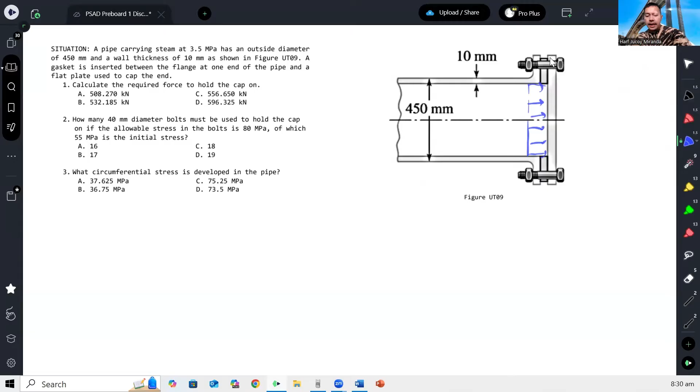Okay, so unahin muna natin unang tanong, what is the required force to hold the cap? Paki-imagine niyo na parang ito ay pipe, tapos syempre may steam doon, so merong pressure dito. Kaya ang nangyari, nung tinakpan mo, syempre magiging under pressure itong cap na to.

Kasi ang tendency, gustong lumabas ng steam, di ba? So ang tinatanong sa atin sa una, ano yung force na kailangan i-resist? Syempre, yung kailangan na force dyan ay kung ano yung resultant force dito. And how do you calculate that?

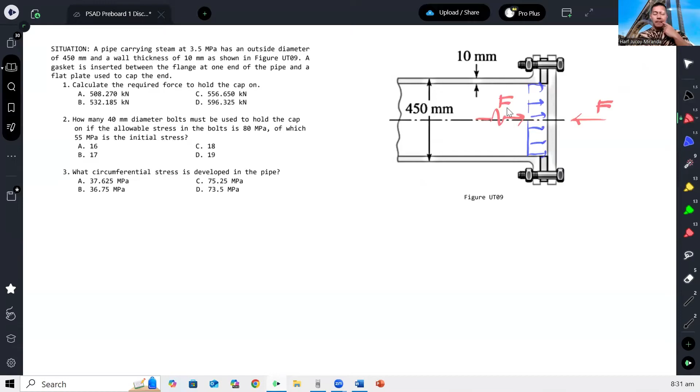Kung titingnan natin sa 3D, ano lang kasi yan eh, circular, ganyan. Tapos syempre nandito yung pressure, paikot, di ba? Nakaikot sila doon.

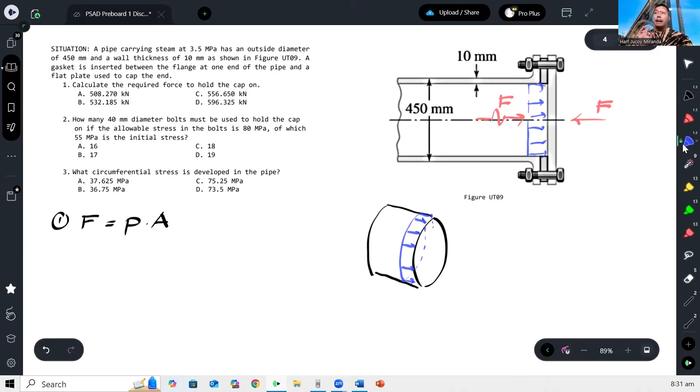So lumalabas, para makuha natin yung force F for number 1, kailangan ko lang pressure times yung area, di ba? Pressure times area lang yan. Yung area, yung cross-sectional area kung saan nakalapat yung force, bali ito yun. Yan yung area kung saan siya nag-act o tumatama, no? So yung area na yan, take note lang na diameter ito, no?

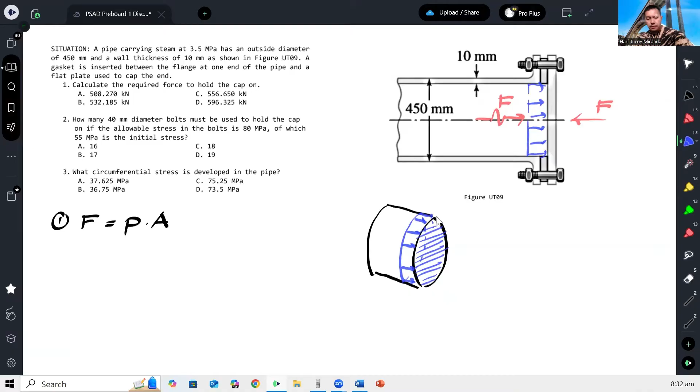May diameter diyan. Pero take note, itong diameter, dalawa yan, ano? Itong 450, outside diameter yan. So ano ba ang gagamitin? Yung outside diameter ba o yung inside?

So ang sagot ay dapat po yung inside, kasi nandun lang naman sa loob yung steam. So itong pressure na to nararanasan dun lang sa loob, no? Wala pagdating dito, wala nang steam diyan, syempre kasi steel pipe na yan eh. So ito lang, nandito lang yung steam sa loob.

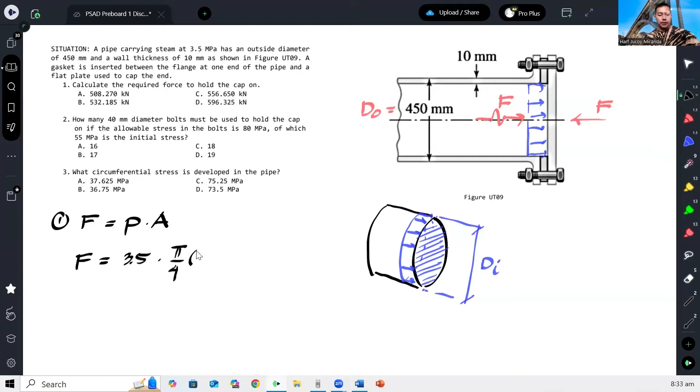Kaya dapat ito ay inside diameter. So therefore, our force must be equal to yung pressure, ito yon, 3.5 megapascal, times area, pi over 4. Inside diameter would be 450 minus thickness is 10, minus dalawang 10, so that gives us 430. 430 squared. So the force would become, naka-megapascal ito kaya lalabas dyan ay Newton.

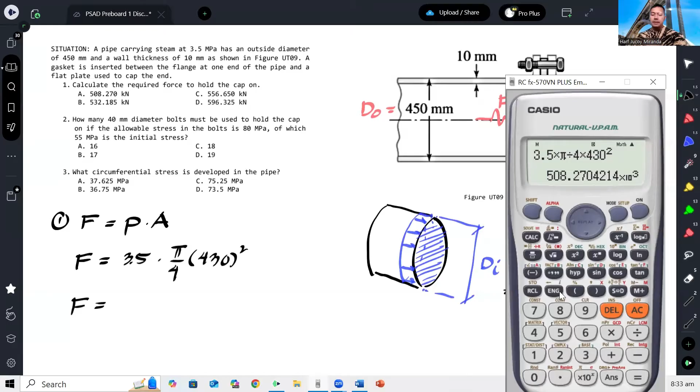So 3.5 times pi over 4 times 430 squared. Ang lalabas dito ay naka-Newton. Para maging kilo, divide mo lang ng 1,000. That gives you 508.27 kilonewtons. So that is letter A.

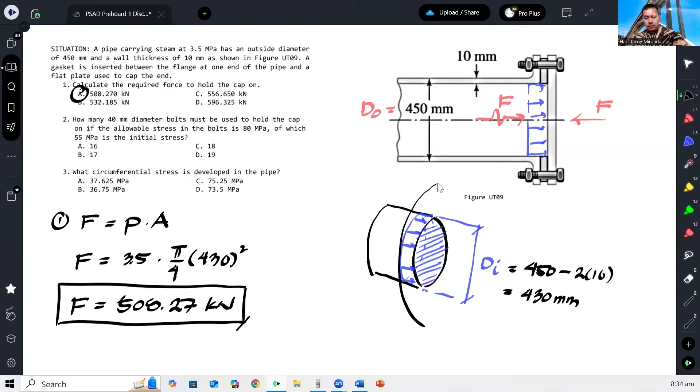Next, how many 40 mm diameter bolts must be used to hold the cap? Ilan naman daw yung kailangan mo na ganito? Okay, so ang idea ulit, parang ito kunwari yung ano natin, flange. Ayan, kunwari yung flange natin, yung cap na to. Okay, so maglalagay tayo ng mga bolts. Yan, lalagay tayo ng mga bolts. So yung mga bolts na yun, yun yung kukontra sa force na to. Kaya sila yung kukontra.

Okay, and how do we compute that? Well, obviously, kung meron ka ditong force ng isang bolt, individual force ng bolt, no? So dapat, kapag nag-summation of forces tayo for number 2, dapat yung lahat. Kapag in-add mo lahat ng individual force ng bolt, ay equal dapat dun sa force na to para ma-hold niya yung cap. At dahil yung bolts naman natin, iisa lang yung diameter, kaya it will be safe to say na pare-parehas lang din sila ng individual force. Kaya sabihin na lang natin ito na yung total na force will be yung number ng bolts times yung force ng isang bolt is equal to F.

Okay, ano ba ang force ng isang bolt? Binigyan po tayo ng diameter, binigyan po tayo ng allowable stress. So syempre, ang allowable stress, you can equate that with the force of the bolt divided by area of the bolt. Ibig sabihin, yung force ng individual bolt can be equated to the allowable stress times the area of the bolt.

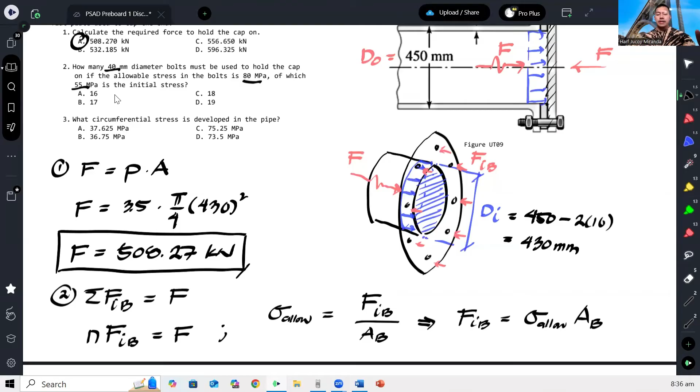Okay, kaya lang yung allowable stress natin, although ang sinabi ay 80 megapascals, meron na daw initial stress na 55. Ibig sabihin, if you are asking, bakit ganun, bakit may initial stress na involved? Kasi di ba kapag hinigpitan mo to, may stress na kagad to eh. So nung paghigpit pa lang, meron ng 55 megapascal. Tapos dadagdagan mo pa ng another force. So may stress pa siya.

So ibig sabihin, yung available na lang na allowable stress ni Bolt, hindi na 80, kundi 80 minus 55. Okay, kasi na-stress na siya eh. So ang natitira na lang na kaya niya pa is yung kung ilan na lang yung difference ng 80 tsaka 55. Pasok natin siya dito.

So, N times 80 minus 55. Tapos area ng bolt, pi over 4 times, ang diameter is 40 squared. And equate natin yan dun sa force. So, 508.27. Here we just need to be careful.

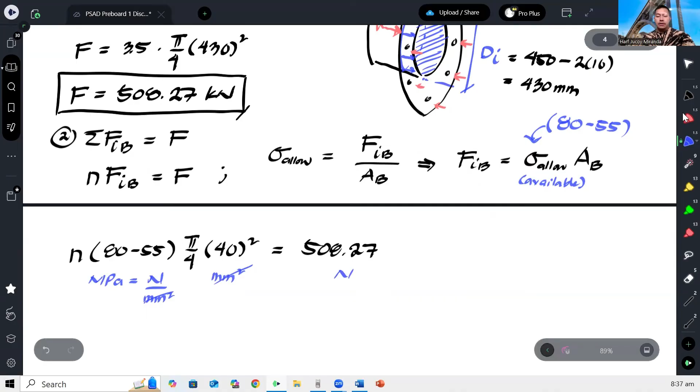Naka-megapascal kasi to, which is equivalent to Newton per millimeter squared. Ito naman magiging millimeter squared. So magka-cancel yan. So dapat pala ito naka-Newton, para naka-Newton din sila pareha. So kaya ang gagawin ko, mag-multiply ako dito ng 1,000.

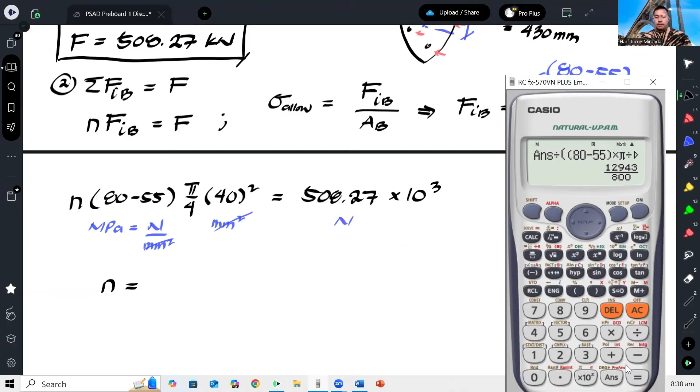So from there, we can solve for the required number of bolts. Divide lang natin ng 80 minus 55, times pi over 4 times 40 squared. Okay, and that gives us 16.18 pieces. Okay, and of course, we will round that up to 17.

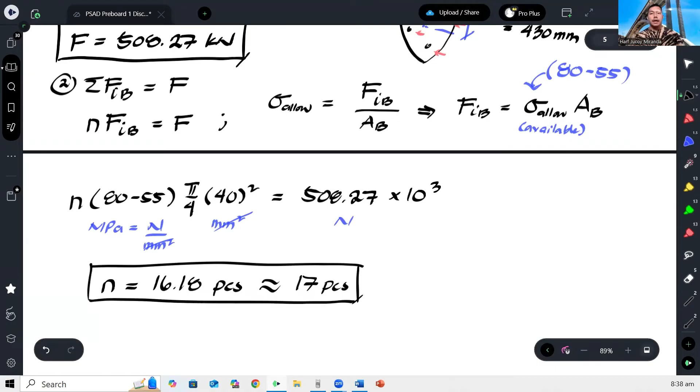Okay, so hence our answer here would be letter B. We don't round down kapag yung B lang kasi ang sinasabi na to, ito yung minimum number. Hindi ka na pwedeng bumaba dyan. Kaya hindi mo pwedeng sabihin na i-round off mo sa 16.

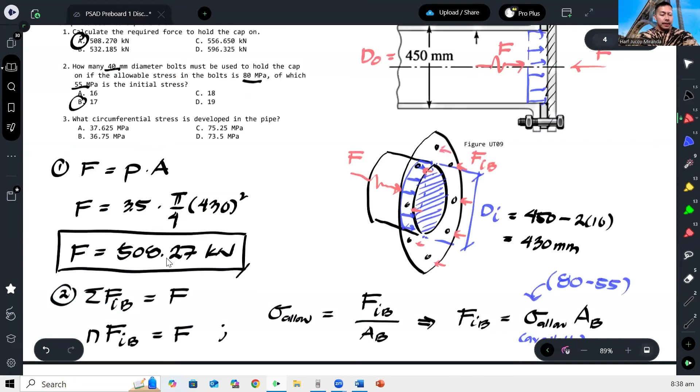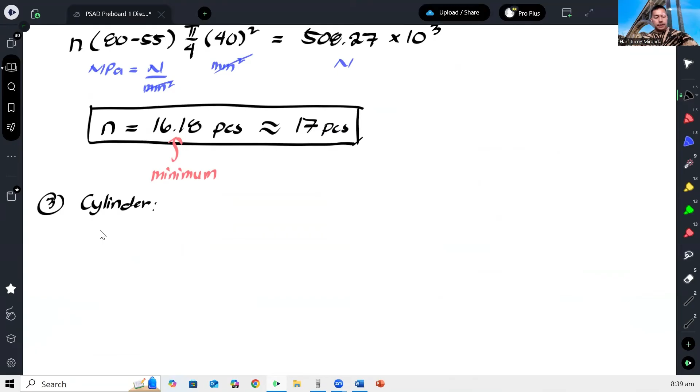Okay, now last question for this one. What is the circumferential stress developed in the pipe? Pag sinabi pong circumferential stress, parehas lang yan sa tangential stress or hoop stress. Okay, which is kapag number 3, kapag cylindrical, kapag cylinder, ang circumferential stress natin or yung tangential stress natin, is automatically calculated as PD over 2T.

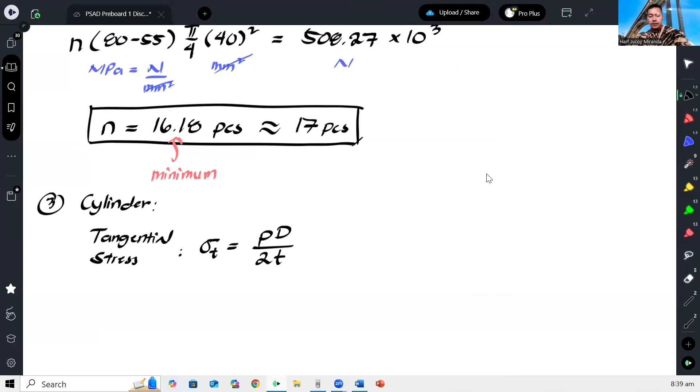Okay, P is the pressure, D is the internal diameter, and then T is the thickness. Pero saan galing yan? So nanggaling yan dito. Kung meron kang pipe, tapos kinat mo to. Okay, so pag kinat mo, tapos in-isolate mo yung ilalim, ganito itsura.

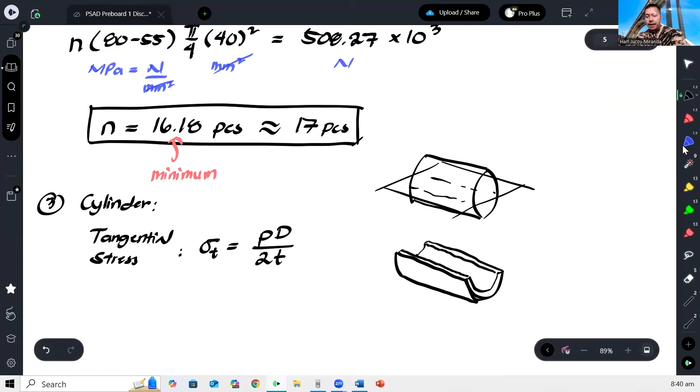Ganyan, no? So alam natin na meron ditong pressure. May pressure dyan, gawa nung P. Yung kukontra dyan, kasi ang mangyayari dyan, yung pressure na tumutulak pababa, parang gusto niyang sirain ito dito. Mahisira siya dyan, parang sasabog siya dito, sa sides. So para ma-prevent yung pagsabog na yon, ang kukontra dyan, yung mismong thickness, yung mismong pipe, yung material na to.

So yung stress na nire-develop dyan, yun yung tinatawag natin na tangential stress. Ngayon, kapag kinumbay natin yon o ginawa nating force, ito gawin kong T, sa kabilang side, gawin din nating T. Tapos kapag ginawa nating force yung pressure, kukunin natin equivalent force niyan, tawagin nating F. So lalabas lang, pag nag-summation of forces ka, F is equal to 2T. But what is F? Di ba ang force ay stress times area. So para sa F, ang stress mo yung pressure. Tapos ang area mo, yung area kung saan naka-project yung pressure.

So dito 'yon, yung area na yan. Rectangle yan, so ang length nito tawagin natin na L. Tapos ito, internal diameter. So ibig sabihin ang force natin ay pressure times area, diameter times L, equals to 2T. Yung T naman natin is ganoon din, force is stress times area. Yung stress mo dyan is yung tangential stress. Tapos yung area mo, bali ito lang.

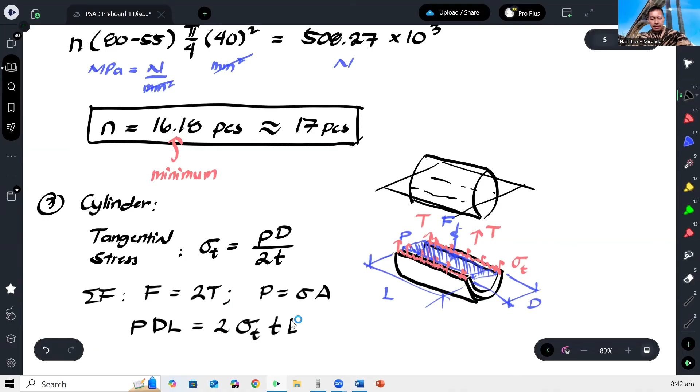Ito, yung area na yan, which is thickness times L. So magka-cancel yung L. If you solve for the tangential stress, lalabas PD over 2T. Kaya ito lumabas, doon galing yun.

Okay, but it's good for us to already memorize it kapag cylindrical. So the reason why I'm showing you this is paano kung hindi cylindrical? Paano kung ibang shape? Kailangan mo i-derive, hindi siya PD over 2T. Anyway, solve lang natin.

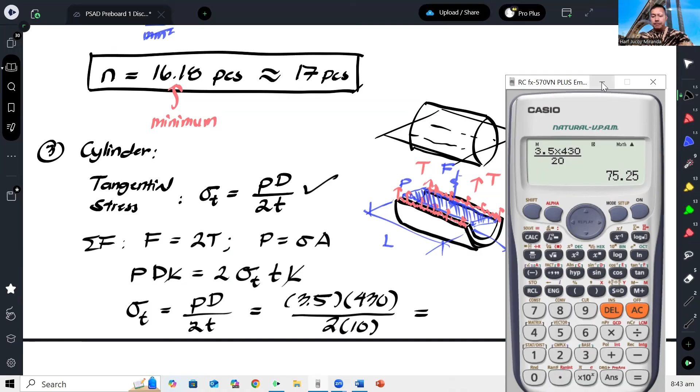So direct substitution lang naman to. 3.5 megapascal. Ang diameter natin inside ay 430 over 2. Ang thickness natin dito ay 10. So ang lalabas na sagot would be 75.25. And that is letter C.

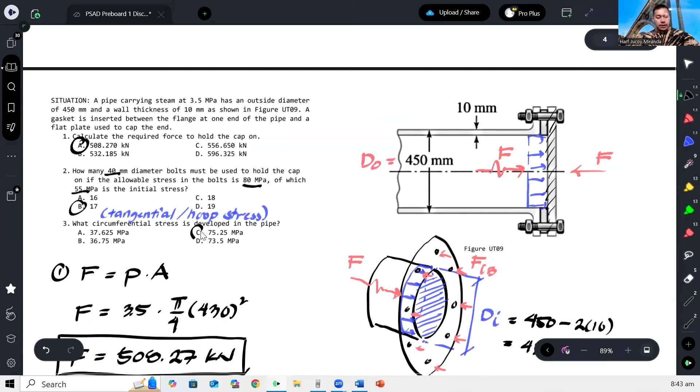And that's how we solve this situation.